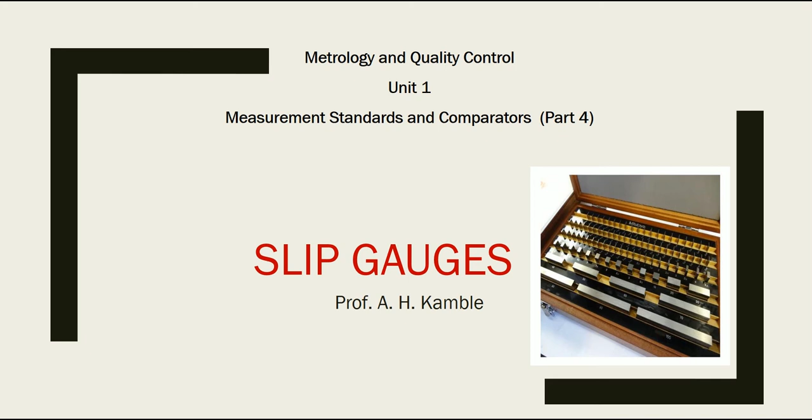This is the fourth part of Unit 1, Measurement Standards and Comparators. In this part, we are going to study slip gauges.

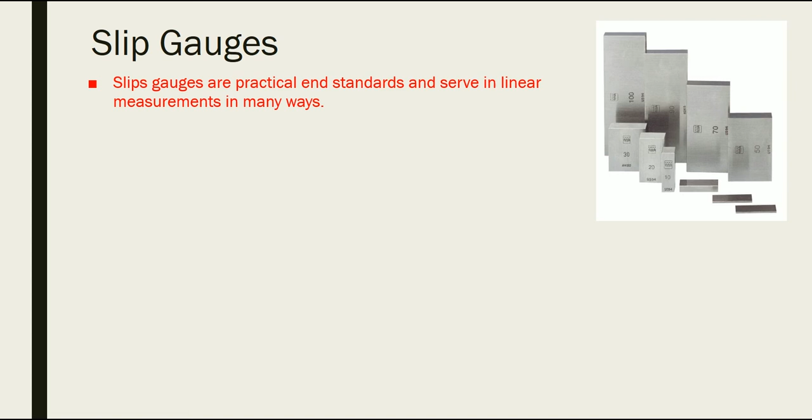Slip gauges are practical end standards and serve in linear measurement in many ways. Slip gauges are highly finished rectangular blocks of different sizes, and these highly finished rectangular blocks are used for the purpose of linear measurement in many ways. Slip gauges are used in engineering workshops for measurement where a tolerance as low as 0.001 mm is needed.

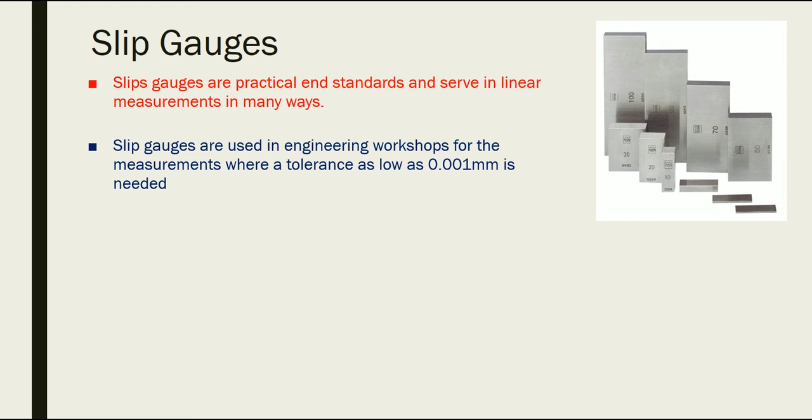These slip gauges were invented by Swedish engineer C. E. Johansson. Now let us see how the slip gauges are made. As I told earlier, slip gauges are highly finished. That means their finishing is like a mirror finish. So how are these mirror finished blocks made so that precise linear measurement can be done with the help of these slip gauges?

Slip gauges are rectangular blocks made of high grade steel having a cross section of about 30 mm by 10 mm. These blocks, after being made into required sizes, are hardened to resist wear and allowed to stabilize so as to release internal stresses. This prevents occurrence of subsequent size and shape variations. So once they are hardened and internal stresses have been released, variation in the shape and size of the slip gauges is almost impossible.

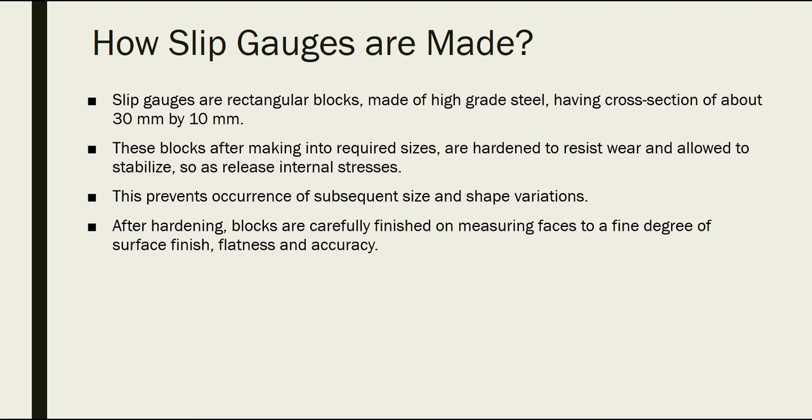After hardening, blocks are carefully finished on measuring faces to a fine degree of surface finish, flatness and accuracy. Two measuring faces of the blocks across which the standard distance is maintained, which is also engraved on the block, can be identified by the mirror-like finish they possess. The high finish is obtained by a super finishing process known as lapping. So lapping is the process used for obtaining the high surface finish.

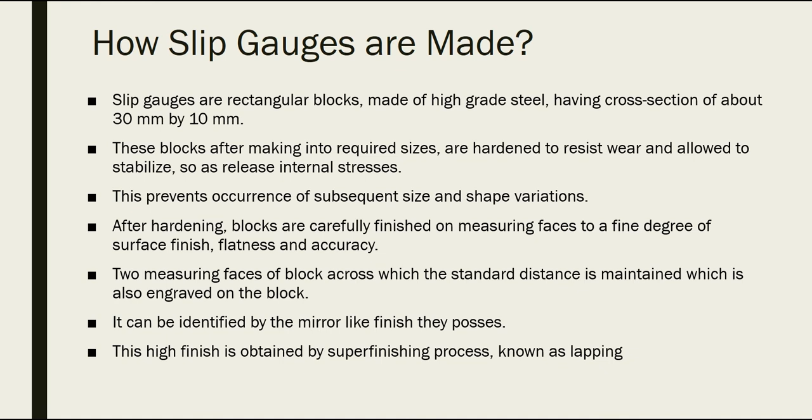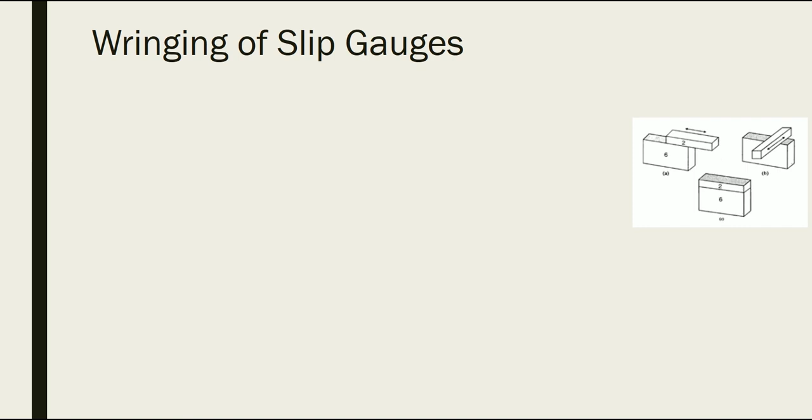Now there is one phenomenon associated with slip gauges by which two slip gauges stick together, and that phenomenon is called wringing. The measuring faces of gauges are flat and possess high finish. If two slip gauges are forced against each other on these measuring faces, they stick together because of contact pressure. Considerable force is required to separate these blocks, and the phenomenon by which the slip gauges stick together is called wringing of slip gauges.

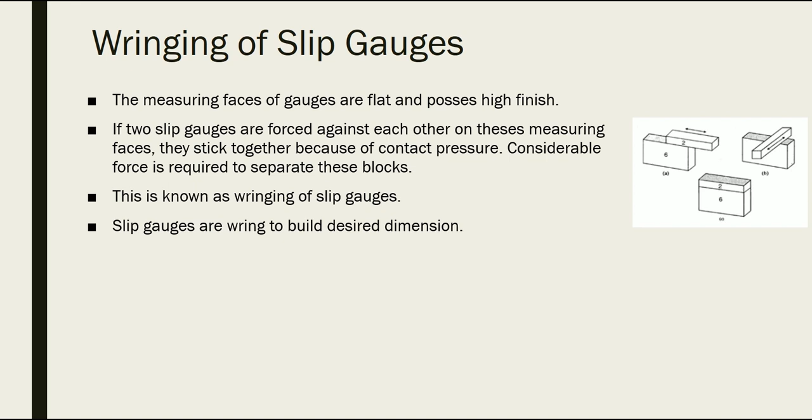What is the purpose of wringing of slip gauges? Slip gauges are wrung to build the desired dimension. Whatever dimensions we need can be achieved with the help of wringing of slip gauges. When two gauges are wrung together, the overall dimension of a pile of two or more blocks is exactly equal to the sum of individual lengths. Almost any dimension may be built up by a suitable combination of these gauges. The wringing phenomenon is due to surface contact and molecular adhesion of the metal of the blocks.

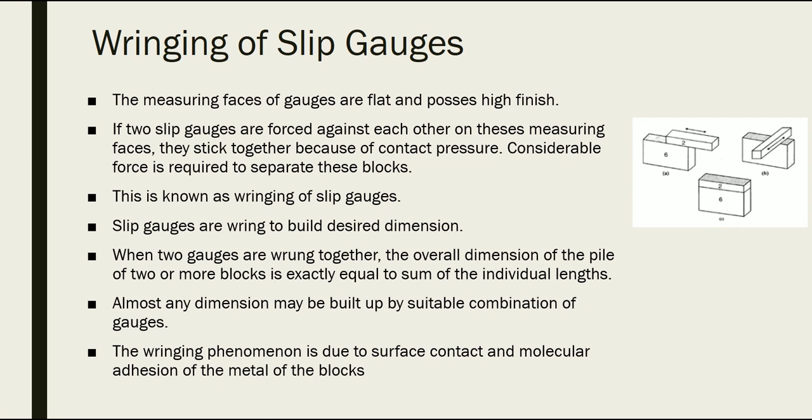Now this picture shows two blocks. One of the surfaces has been rubbed over the other. Once they are rubbed, contact pressure develops between the surfaces, because of which the two blocks stick together. In that way the two blocks can be stuck together in order to achieve the required dimensions. So this is all about slip gauges.